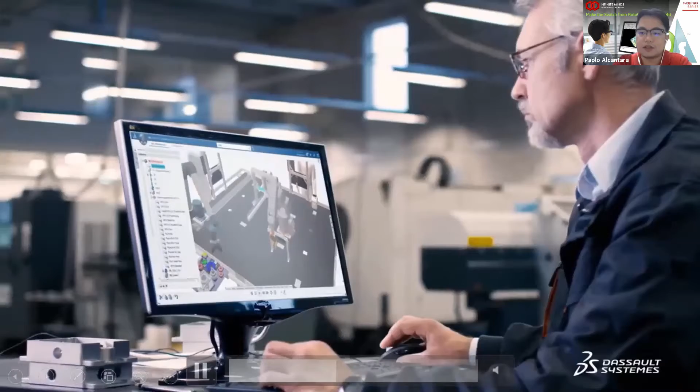We're a relatively new solution partner. Last year we were appointed as an IMTC SolidWorks authorized value added reseller. So we are now a SolidWorks authorized value added reseller.

IMTC was established on May 17 as a training center, and then eventually we evolved and became the Dassault Systèmes software provider. So these are the products and solutions we offer under Dassault Systems. We actually cover a wide range of software solutions, not just these, but these are the ones we focus on the most.

So first, we have the 3D Experience platform, SolidWorks, DraftSight, Delmia Works, and Simulia. Let me give a brief description of all the software.

First, the 3D Experience platform, this is your cloud-based end-to-end solution. What does cloud-based end-to-end solution mean? As we all know, everyone now is in a work-from-home setup. So when we get 3D Experience, we get a centralized platform, which is our cloud, and from there we can work seamlessly and share our data with our team wherever we are in the world or office. So we get seamless interaction, a better workload, and better interaction with our co-engineers and team.

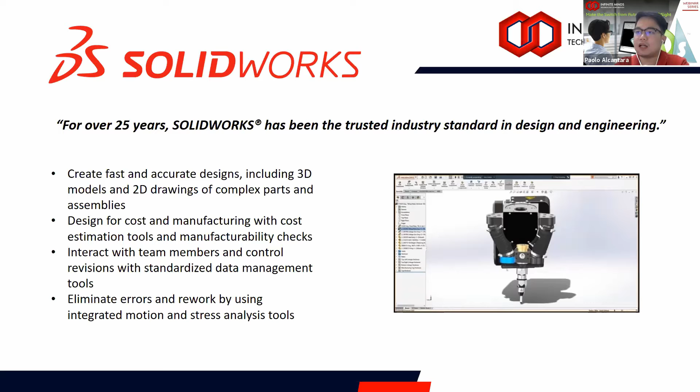SolidWorks, for over 25 years, has been a trusted industry standard in design and engineering. As you all know, maybe you've heard of SolidWorks. Again, it's a 3D design software platform, but it's not just 3D design. We can also integrate CAM, simulation, 2D design, and directly convert any 3D design to 2D drawing to make it easier to manufacture. So it's a complete set from 2D up to post-process output.

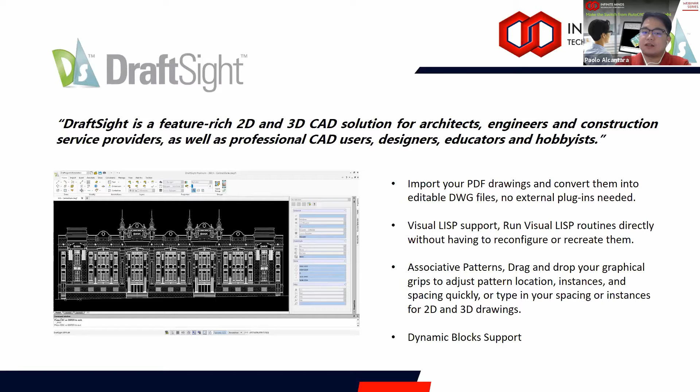And then again, 2D DraftSight, very similar to AutoCAD. We can see if it's worth the switch if we try using DraftSight instead of our existing AutoCAD or any 2D design software. And then again, 3D Experience, this is our cloud collaboration platform.

Throughout the years, these are the clients we've provided SolidWorks and DraftSight to. We have ITDI, Sagara, DFE, Engtech, MDCC, and Soler.

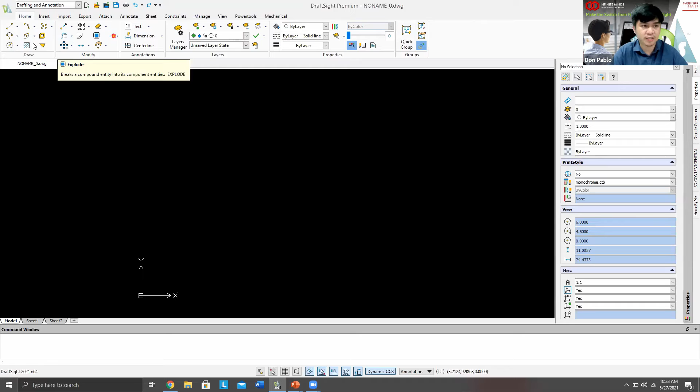For me personally, ang tingin ko sa kanya ay parang napaka-light niya, hindi siya nakaka-overwhelm dahil hindi overloaded ang mga commands dito. As you can see, you can add more just by pressing right click. Hindi siya nakaka-overwhelm at para siyang na-compress ni DraftSight, kasi dito may mga drop-down menus - ito yung by default. Kung i-click mo lahat ng related commands sa line, andito na siya sa drop-down menu. Para sa akin, medyo light siya, hindi siya overwhelming kahit baguhan ka pang user, kaya hindi ka matatakot na pumindot-pindot o gamitin.

User interface - dito sa top part, meron kayong user interface profiles at quick access toolbars, na meron din kay AutoCAD. Exactly the same sila - you have 3D modeling, classic, drafting, and annotation. Next is your panels - you have your tabs and ribbons, which is also present with AutoCAD.

Let's move here - you also have your properties. Very, they look alike with AutoCAD, no? Since you have all these features, plus your command window and status bar. Basically it's similar with AutoCAD - nothing much, nothing new to you, right? Madali lang siyang sanayin.

And of course, if you're thinking about customization, you can also customize your own user interface. You just go to manage and click on interface so you can customize it. Napaka-user friendly dahil dun sa feature na yun. Later on pwede ko siyang i-discuss sa inyo if you're curious about customization, but that's another webinar, or you can check our YouTube channel since I will be producing tutorial videos there. Pero later pa yun, in the future - as of now, wala pa.

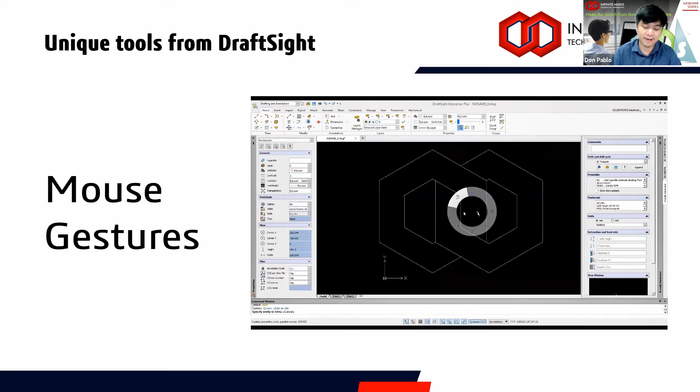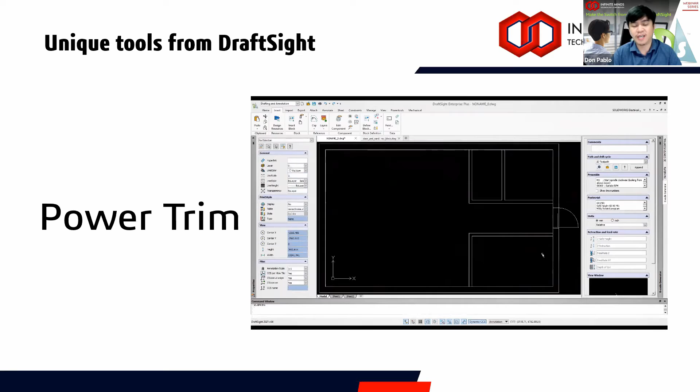So what's the purpose of this? For example, you want to install doors on your layouts, and there are hundreds of doors. With this, installing and trimming is very fast - it wouldn't even take 1 minute if you're already used to using power trim. So that's another time-saving tool unique to DraftSight.

Okay, let's proceed - we're done with power trim. Of course we also have extend. For example, if you made a mistake trimming a line, it's easy to bring it back - you don't need Control Z. Just activate power trim, hold your shift key, and automatically it will extend up to the point where the line intersects again. I'm just holding the shift key and hovering over the lines for automatic extend. You don't have to select your boundary lines again.

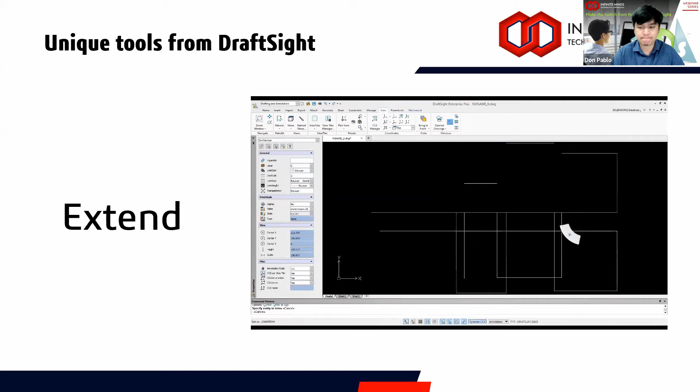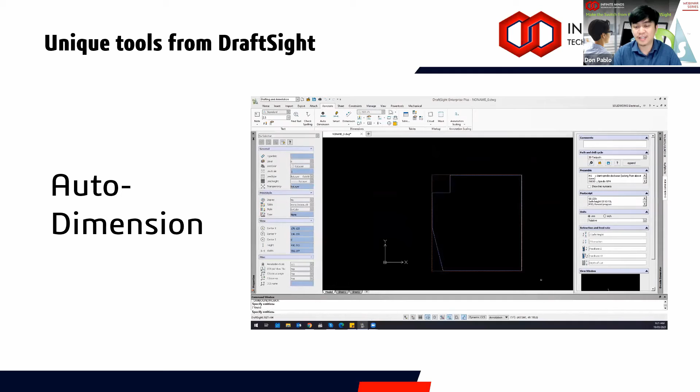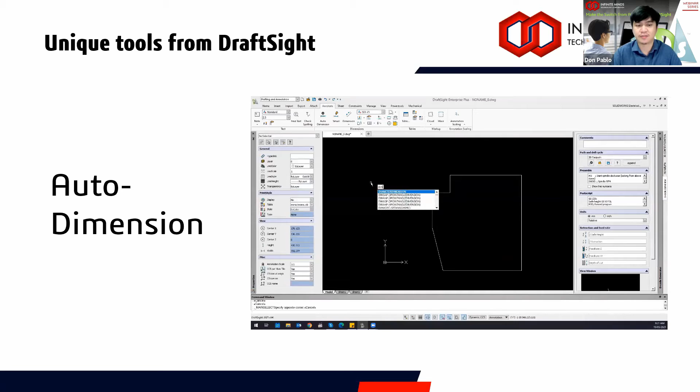And last but not the least, we have your auto dimension. As the name suggests, it can automatically put dimensions on simple drawings, maybe not complex drawings, but on simple drawings, yes, it can. It's just a matter of seconds for you to dimension your simple drawings. You can also set the position, lower left or other options. So you have your choice. Again, another time saving tool.

So ano ang purpose? What if the client has a CAD application that is not compatible with AutoCAD? Paano nyo bubuksan yung file niya? Paano nyo siya ma-edit or ma-view? First off, you can use DraftSight. Since it has a wide range of compatible file formats, maybe the CAD application of the client has a compatible format kay DraftSight. So convert nyo muna kay DraftSight, and then from DraftSight, convert it to a version that is compatible with AutoCAD, and then open nyo na yung file with AutoCAD.

Or you can stop with DraftSight. You can edit it in DraftSight already, since compatible naman siya kay DraftSight. DraftSight will convert it to vector lines, and then you can edit in DraftSight. Now you don't have to convert it to AutoCAD pa. So that's a great flexible format for DraftSight.